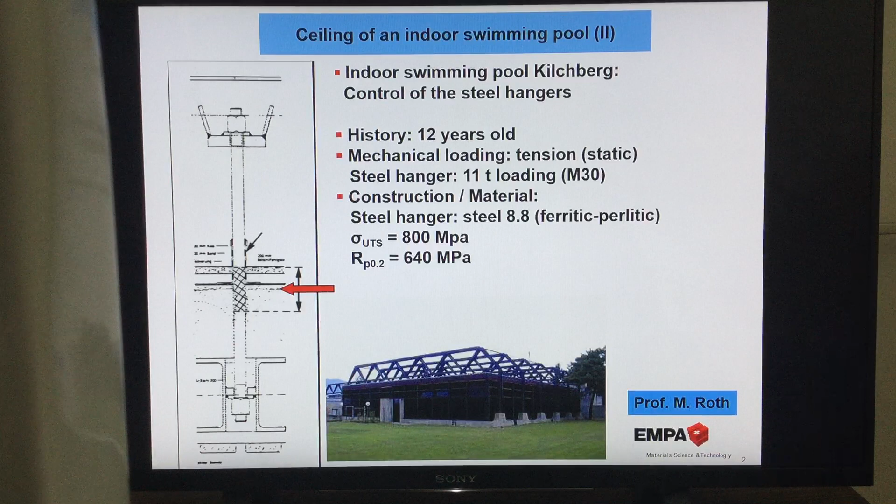But we come back to this later. Yes, this I told you already, there was already found a region of intensive corrosion attack. Okay, so when we have to control this, we have to make a decision what we are doing.

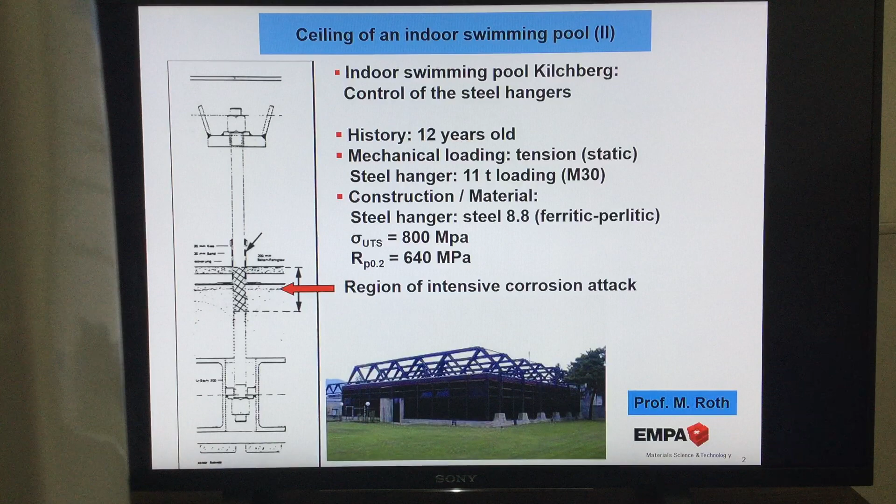And it was again about 200 of these steel hangers which supported this ceiling, and we had to make a selection. Of course, you cannot change and watch all the 200 ones. We said it was in the range of about 12 or 15 steel hangers, which has to be replaced. Of course, step by step, you remove one steel hanger and you put another inside. Remove the next one, and of course, you make also a selection of the different areas.

And this is already, we asked then ourselves what kind of investigations we have to make. Because we have to be, this is very important, at the end absolutely sure in our conclusion if this indoor pool has to be shut down or it is open.

There is nothing between, and we have to be absolutely safe, because when we say we can leave it open, then we have to be sure that in the next 20 or 30 or 40 years of the lifetime of this indoor pool, it will not collapse, because it's only 12 years, and normally these kind of buildings have a lifetime of 50 years. So we have to make also a prediction for the next 40 years. So we have a lot of responsibility. So we have to work very carefully.

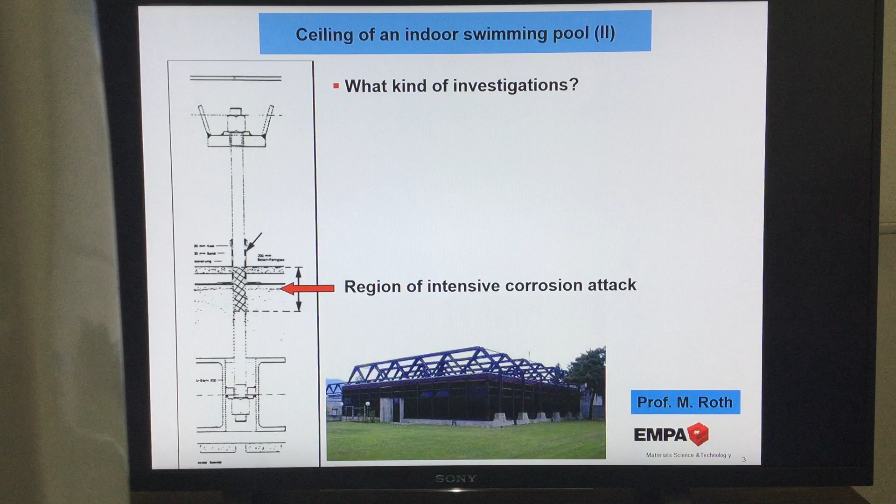The first thing what we have to do, of course, we have to check then talk about this corrosion attack, which we found here, if it's similar to that what we saw before, if there is of course any cracks inside. And to find this out, it's a very simple but a very effective test which we start at the beginning.

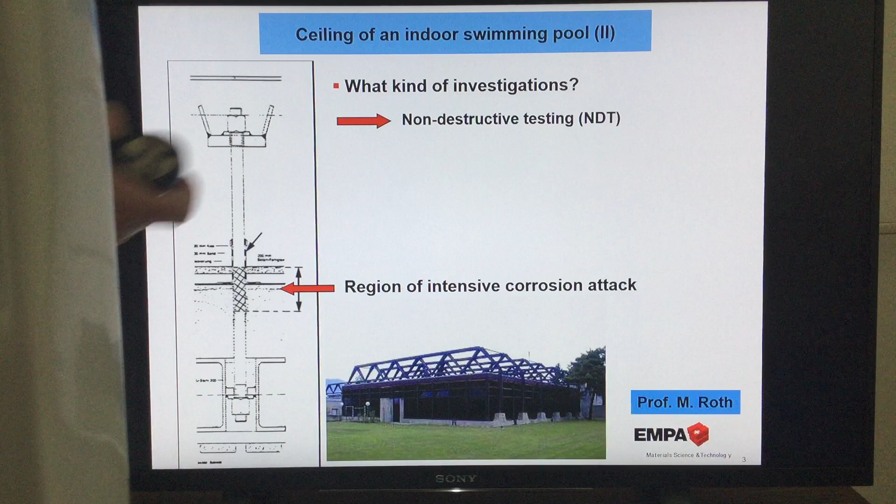So-called non-destructive testing: we have the whole bar, the whole screw, the steel hanger which we see here. There are different ways of non-destructive testing. One way is you apply a certain color on the material, and under UV light you will see if there are any indications of cracks, and you can investigate very carefully. It's very important to have an idea of the whole component, not just partially.

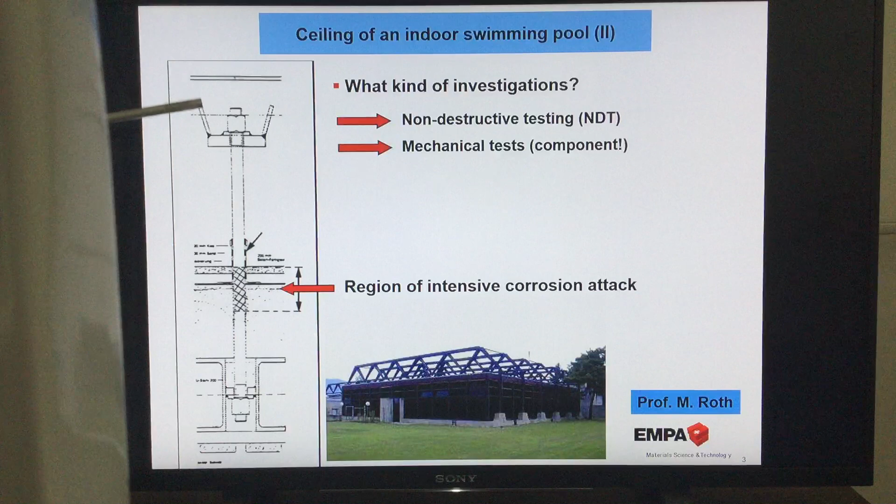The next step is also very important. Maybe there are some signs from non-destructive testing, some appearance if there is a crack there, or maybe in this region. Then we selected some of these steel hangers and performed tensile tests directly on them. Mechanical tests, a tensile test - but it's very important to use the component itself, not any random specimen, because that tells you nothing. We have to make a mechanical tensile test with the whole component, and for this we have big enough machines available.

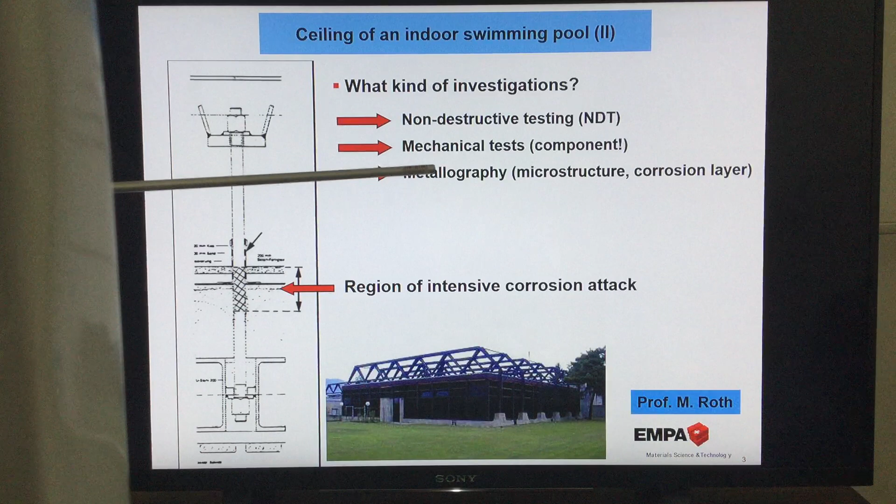And the third step - we have to know something about this corrosion layer which we already see here, and it will be very important for the prediction to make a chemical analysis by XRD or by microprobe analysis. These steps are important, and you have to keep them carefully in mind. I will also ask about these different steps in the examination.

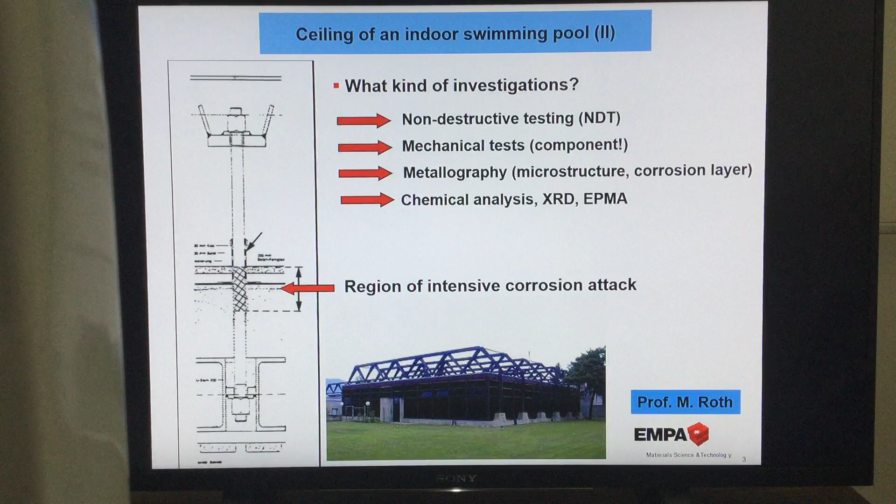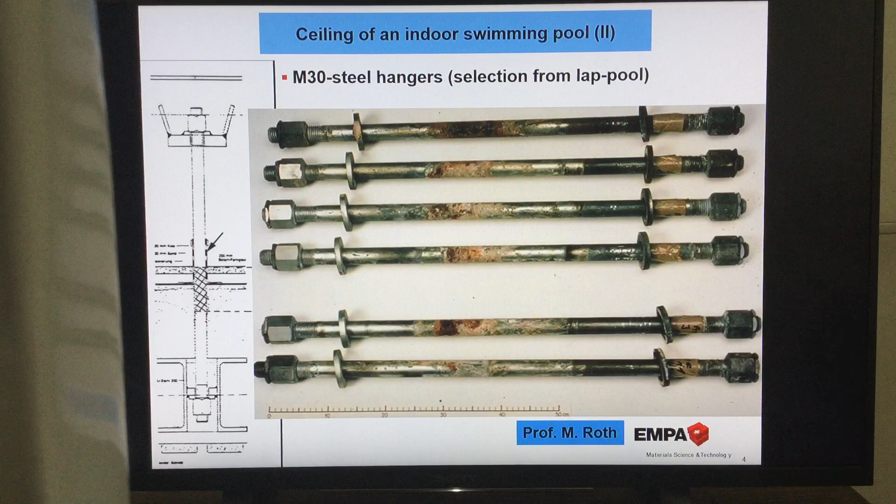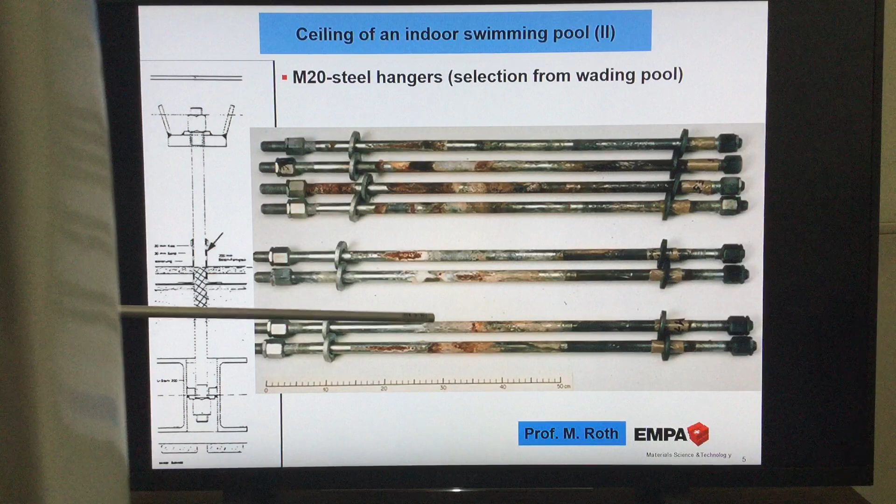Now you see here these steel hangers, some of them were selected from the lap pool, M30, and everywhere you see more or less at the same spot this corrosive attack. And that one from the wading pool, a little bit smaller ones, M20 steel hangers, but again here in the upper middle part we see this kind of corrosion attack. It fits here inside this drawing, and you see it correlates quite well with this area which we have seen before on top.

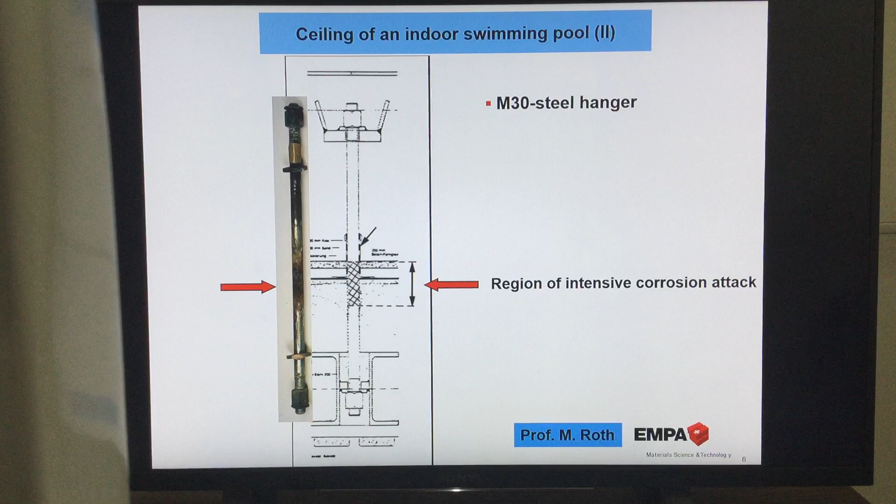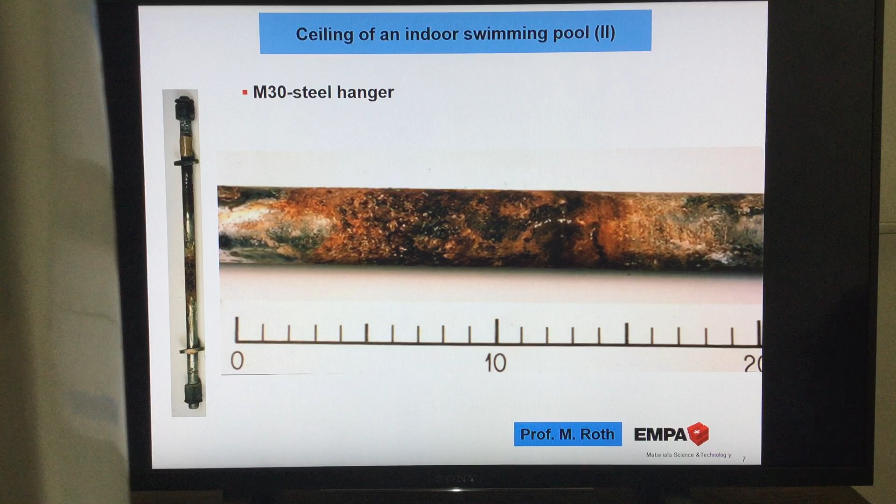Now at higher magnification - I even have this component with me. Look at this here, it has a thickness of 30 millimeters, and it's heavily corroded, isn't it? It looks really crazy and dangerous. And when you compare this, especially with the austenitic stainless steel which we investigated before, with the Uster case, from outside it looks really heavily corroded, crazy, and we have to be afraid.

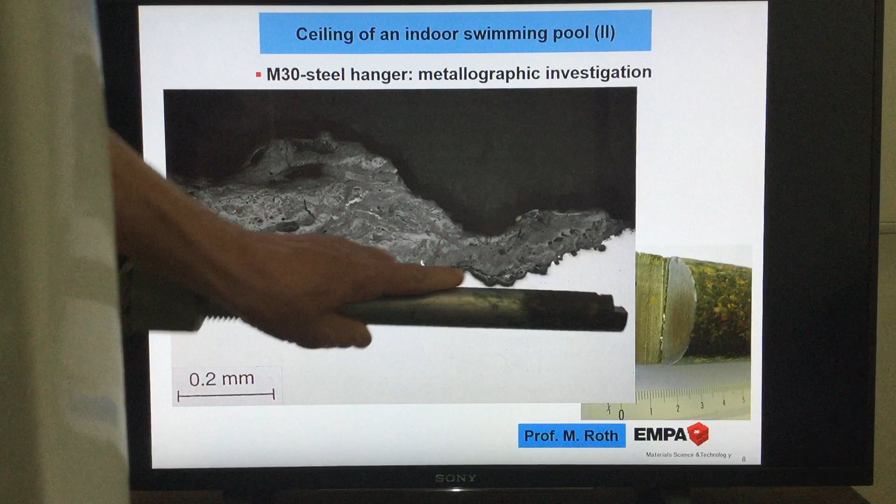But now the next step is coming, shown here: we made this cut inside the material where it was heavily corroded, and we see already our metallographic specimen. In the metallographic specimen, this white part is the iron underneath, and that part here is our corrosion layer. The corrosion layer is not uniform, it's a little bit higher here.

Now, that is the most important image. We compare this again with the Uster case. We have here this corroded layer, but do you see any crack? There is no crack, there is no crack inside the material. To watch for cracks, it's also very important that the base material, the iron, is not etched. You can etch it to see the microstructure, but without etching you see much better if there is any crack. You see here a small crack in the oxide layer - that is even the reason why it's a little bit bigger. I'll come back to this later. But importantly, no cracks inside, and cracks are the dangerous part we have to take into account.

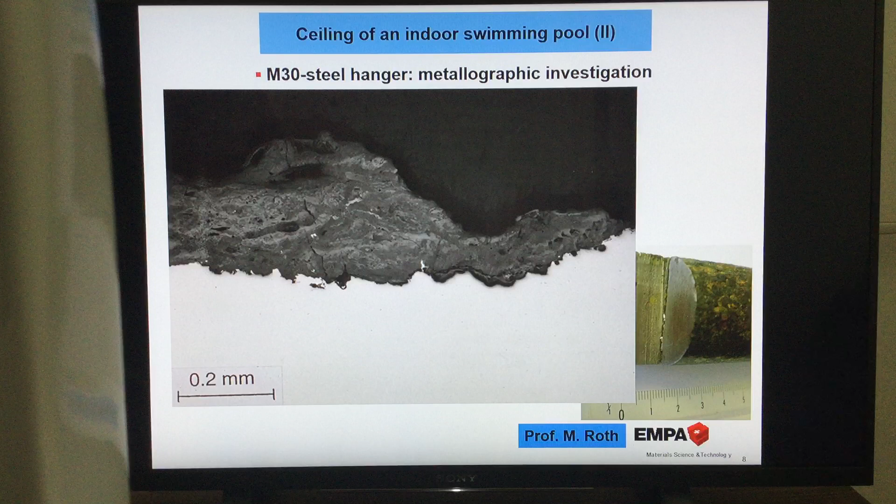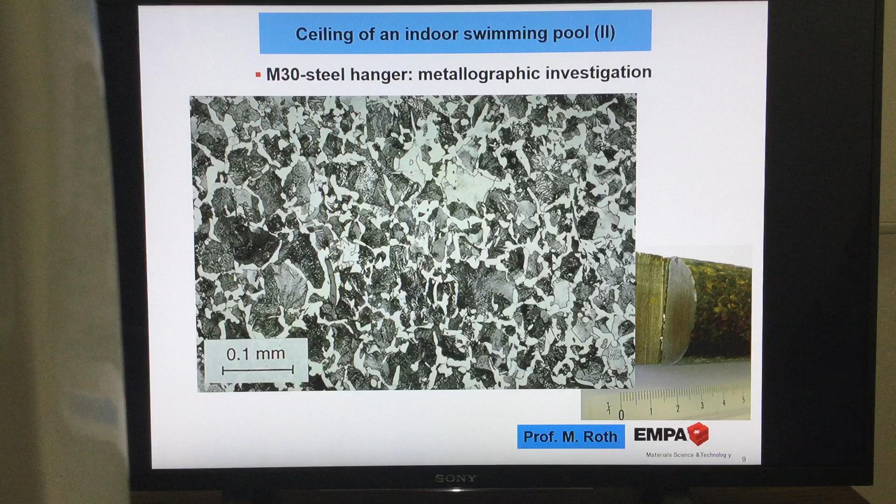And you know the phase diagram of iron carbon. When you think of the eutectoid, where is it? The carbon where you have 100% pearlite is at 0.8% carbon. So when we judge this, the amount of ferrite, I guess there is about in the range of 0.6 to 0.7% carbon inside. Okay, ferrite, pearlite microstructure.

Now the next slide is very important. It shows you the whole diameter of our steel hanger and this cut here. And you see here the inside, it's again just white. You see no cracks inside. That is our base material, and around you see the oxide layer. You see here the scale, it's 3 millimeters.

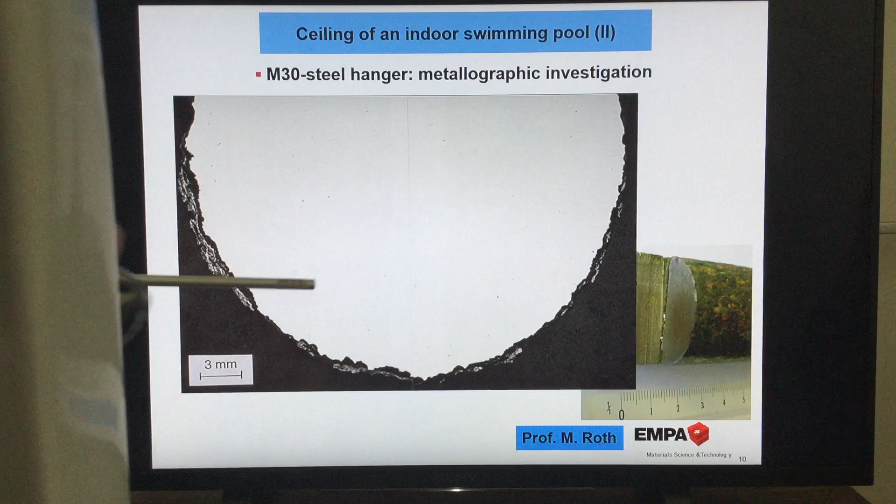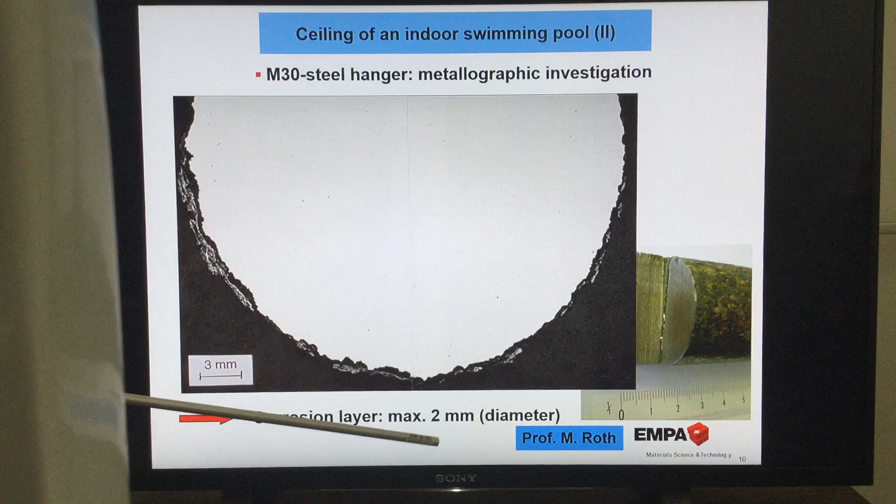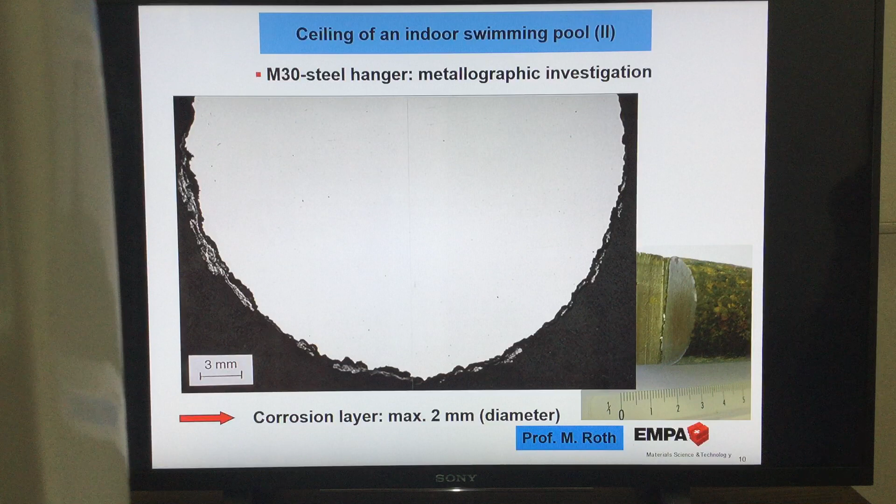So we can judge a little bit because it will be important now to calculate the stress in the rest of the diameter, because that oxide layer doesn't take over any load. So the stress will be higher because the diameter is reduced. Let us judge the diameter. When you watch this, I think it's about here 1 millimeter, maybe here a little bit more. So totally we judge it's about, in the diameter, the corrosion layer maximum 2 millimeters, which will be reduced from the load-bearing area.

Because again, the corrosion layer is just brittle, it falls apart, you can scratch it off, it's less. So in the next diagram, and this is also very important, this diagram you have to keep in mind, and I asked this also in the examination.

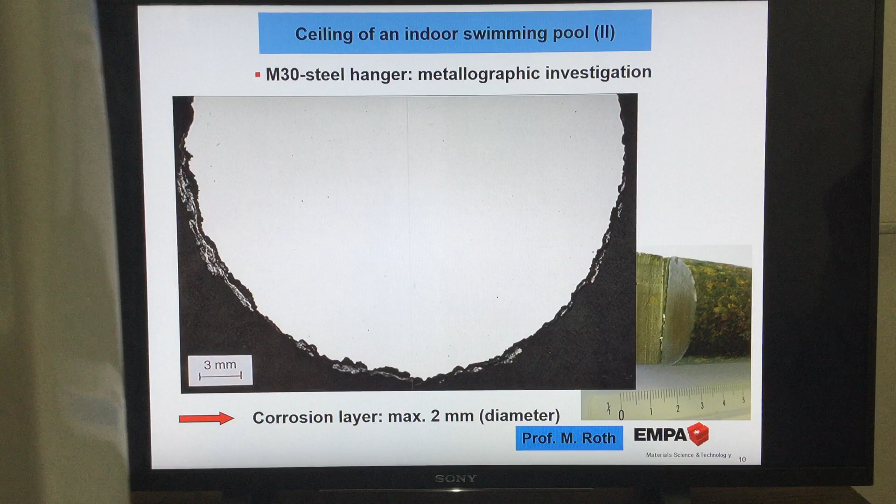You do not need the exact values, but it is the most important diagram here for this investigation. It shows the following: you see here now the stress, you see here the diameter. That's the original diameter, 30 millimeters. So the original thickness of our bar, which we see here, that bar.

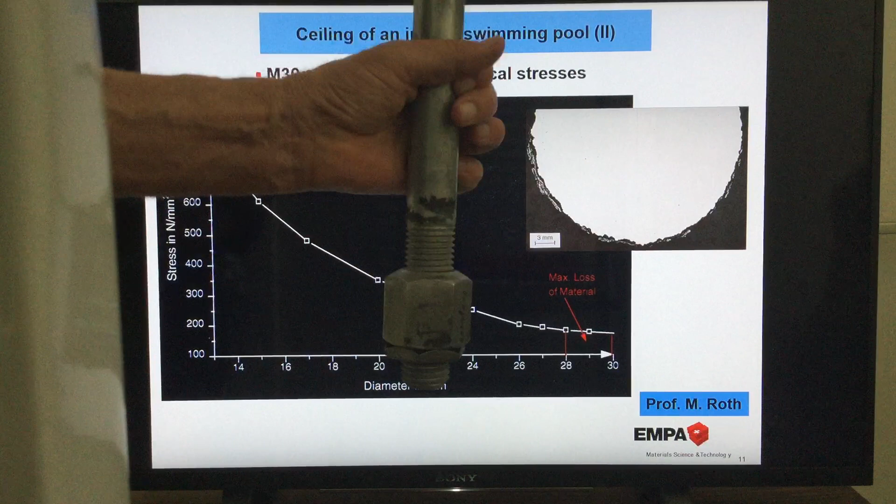And you see something else before we come to the layer, that compared to the Uster case from before, this is our original stress in our steel hanger. It's in the range when we go to here to about, let me say, 160 megapascal. And you see here in this line, the yield strength, I told you that was 640 megapascal and the ultimate tensile strength 800.

So we are very, very safe. We were in our design very far away from the critical amounts of the stress, very far away. And due to the fact that it is so far away, you easily can calculate here because we have the diameter, we have the load on each steel hanger. I told you 11 tons.

You can easily calculate then the stress, how it gets a little bit higher when there is less diameter available. Look, when you come here, of course, when you have instead of 30, you have 18 millimeter diameter available, then the stress gets higher and higher. That's clear, it gets less. But in our case, where we have only a loss of about 2 millimeters, you can even say 3 millimeters, it's only a slight increase of the stress. So that seems to be quite safe, very safe.

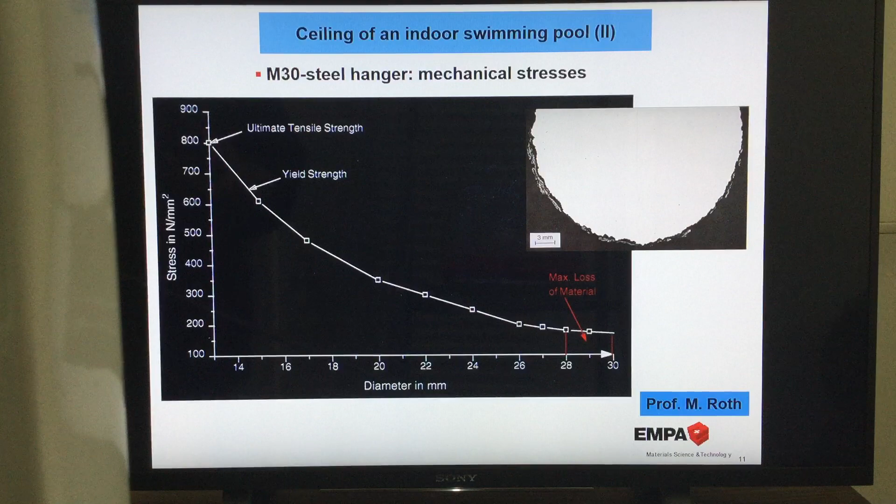So we have to check, and we have to apply - this is now very important - our knowledge about corrosion of iron. This will be corrosion of iron. Yeah, first again the comparison, and then we come back here to the corrosion of iron.

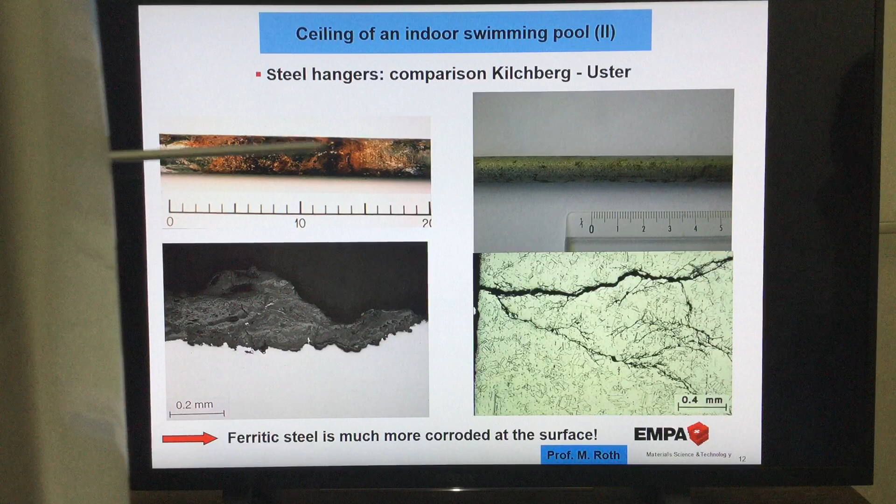Now, as I told you, we have to think about the mechanism of this oxide layer. The question came up if this oxide layer in the next 40 years will grow, not here but in this direction, and then the load-bearing area would get smaller and smaller. We will ask ourselves, what is the mechanism? The mechanism is that this front of the oxide layer going inside needs oxygen, 2 minus oxygen, to diffuse here inside and then react with iron and grow inside.

However, our knowledge about oxidation of iron is the following. These are the different steps of iron oxidation. It starts with iron and OH groups, then the next one, iron oxygen, and the next one, iron 2O3, and the last one is iron 3O4.

What do we know about iron 3O4? It is very stable and very dense, and if this were iron 3O4, then the diffusion rate of oxygen is extremely low. So it would take a long time, or even no oxygen diffusion would be possible, for this layer to go further inside. That means if we find this stable oxide with high density and low diffusion rate for oxygen, then it would be fine.

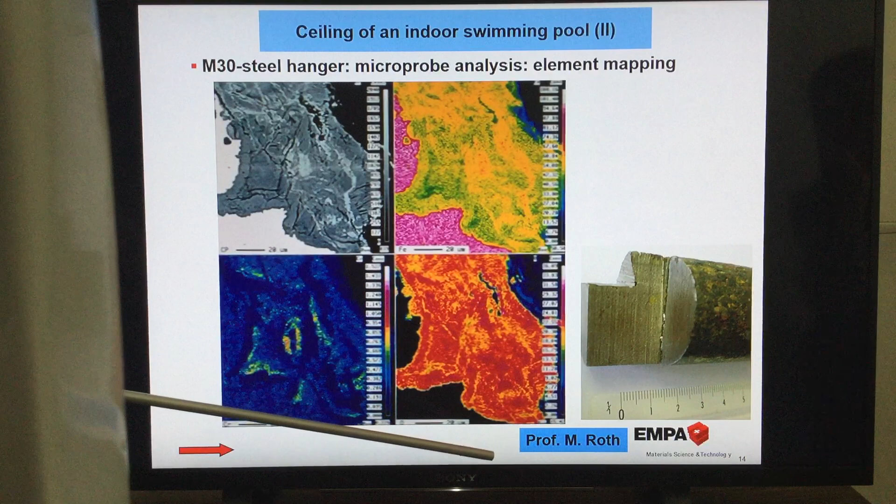However, this just shows you a little overview. For precise measurement, what kind of examination do we use? We scratch away some material from the oxide layer, bring it to the chemical laboratory, and they tell us exactly what kind of composition it has. And you can already guess what we found: the oxide layer had the composition iron 3O4, exactly what we liked to have, and what we expected from our knowledge.

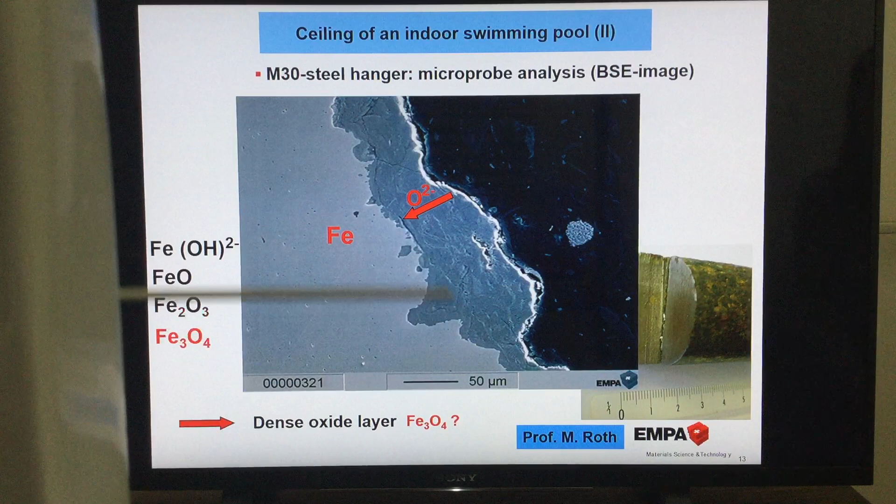When there is this dense oxide layer with a low diffusion coefficient, we should be safe—no growth anymore of the oxide layer inside. That's very important. Okay, we already can conclude: the construction and the material is safe.

We have seen the construction, the design. We were very low in the static stress of these steel hangers, very far away from the limit. The material selected showed some corrosion, a corrosion layer, but no cracks, and again the mechanical loading was far below the yield point of the material. The material's loss due to corrosion is predictable, and the corrosion process, at the end, forms stable oxides.

You can demonstrate this also in a test: there is this so-called parabolic growth of the oxide layer. And finally, we are nearly at the end, and we want to be very safe—but to be absolutely safe, and why not?

Because we want to be 100% sure, the following was proposed to the authorities of this small town of Kilchberg: periodically, over the next 2 to 3 years, and again maybe another 3 to 4 years, not all of them—like the 12 or 15 here now—but 2 or 3 should be checked again, though not those which had already been replaced, those that had been in place for about 12 plus 3 years, or 15 years, to check if this corrosion layer is stable and not progressing. Then we are absolutely safe. So: no shutdown of the swimming pool, and periodic control of the steel hangers.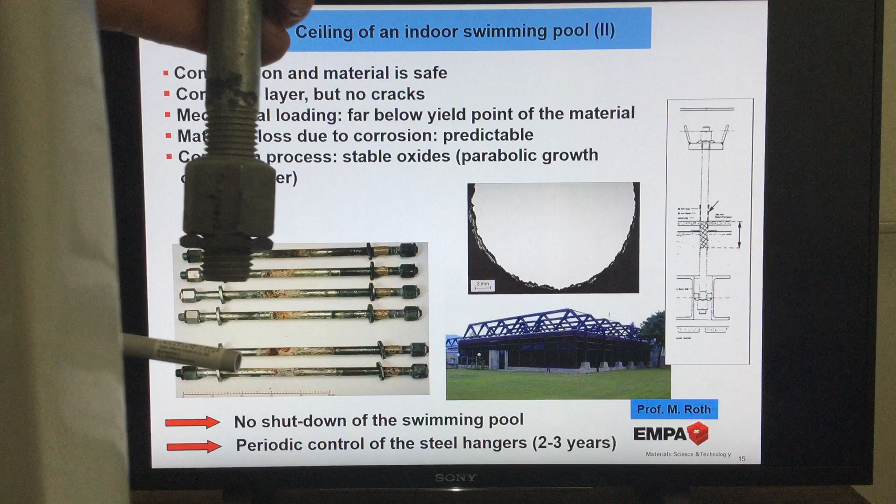So all these investigations and our knowledge about corrosion, especially of this ferritic steel, were important to come to a clear conclusion. And again here, the architect, the engineer, did the right job, even selecting a material which is much cheaper compared to austenitic steel, and the design was good enough—it's no problem that this steel hanger has a slightly bigger diameter, it gives more safety, and price doesn't play any role. So we have here a nice example where everything turned out well.